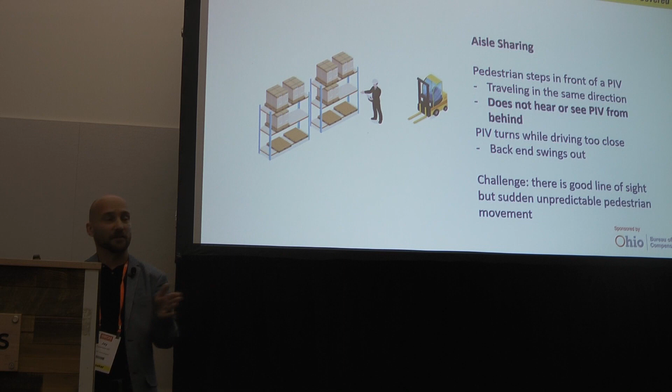Here's a scenario that's brought to us all too often. It's called aisle sharing. Here, a person is walking in the same aisle as a PIV, and we have good line of sight, right? The driver can see the person, but the person doesn't hear this PIV approaching from behind, doesn't see the machine in their peripheral vision, and one of two things can happen: the person can step unexpectedly in front of the machine, or the machine turns, and forklifts turn awkwardly on the back wheels, so that machine can clip a person.

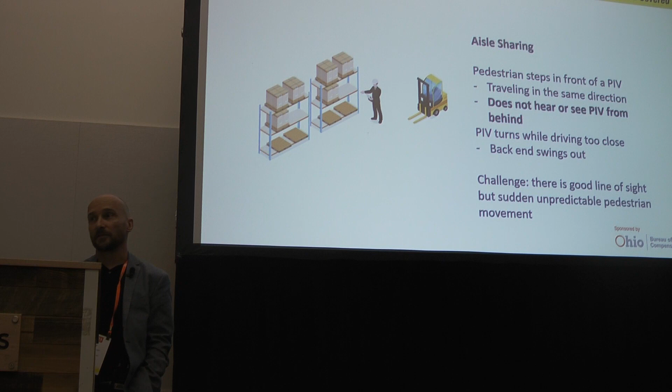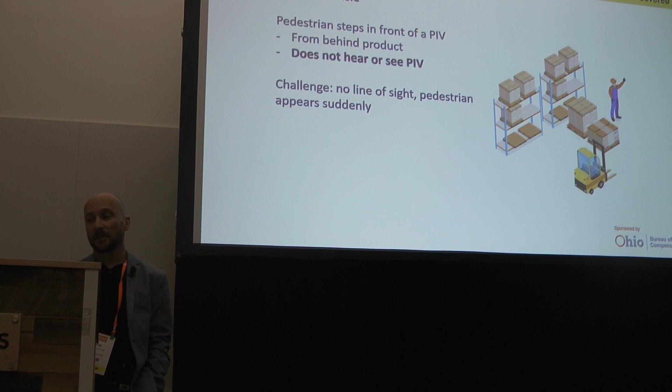You hear about this one a lot. So here again, we have good line of sight, but you have some sudden movement of the pedestrian, and the driver doesn't have enough time to react. Similar in forklift lanes of traffic, people can step out from behind obstructions. Here, in this case, we don't have good line of sight, so it's very unexpected. Driver's going along, person steps out, contact happens.

Order checkers — this is one of the most complicated and interesting scenarios that we've dealt with. You're on a loading dock and there's a lot of chaos. It's a wide open space, you have a lot of congestion, and the last thing that happens before product goes on your truck is you have order checkers or verifiers. These people are checking the contents of a pallet against a list to make sure that what is on that pallet is supposed to be there. Now at the same time, you have PIVs that are staging pallets, so you have new material coming in behind to be checked, and verified pallets being lifted and going onto the trucks. Again, they're faced away from traffic, and they're coming out from behind pallets. Just with all the chaos and congestion on a loading dock, it's a very dangerous situation — one that I think we handled pretty well, so I'm looking forward to talking about a solution for that.

Doorways — this one's kind of obvious. You open a doorway, if that's a forklift aisle, as soon as you open it you can't see through that door, you can't see through the wall, so unexpectedly there can be a moving machine on the other side.

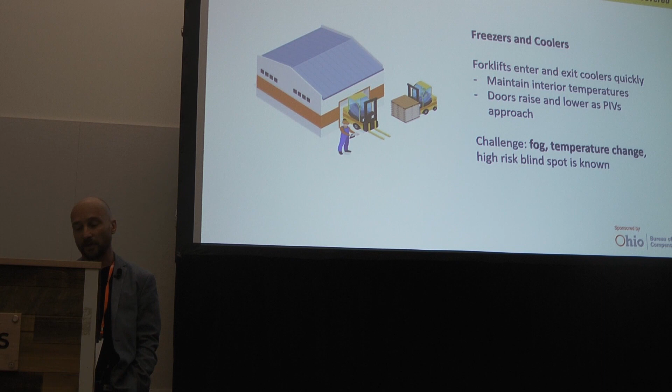Blind corners, again, a fairly obvious one. We can't see through walls. These are high-risk locations that are probably known, and if you have these intersections or corners in your facility, there's probably already a convex mirror there so you can see around corners, but accidents still happen.

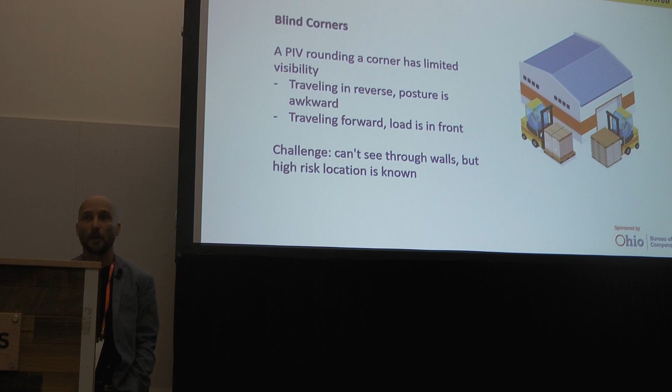Cross aisles. Most places we go have things like blue lights now, designed for these cross aisles. Mostly it's machine traffic going the long ways in cross aisles, but you do have people and machines going the opposite direction. That blue light is intended to give you some warning, but often it's not seen, and by process you should beep and stop when you come to an intersection, but things happen, horns aren't heard, and you still have near misses and often collisions at these cross aisles.

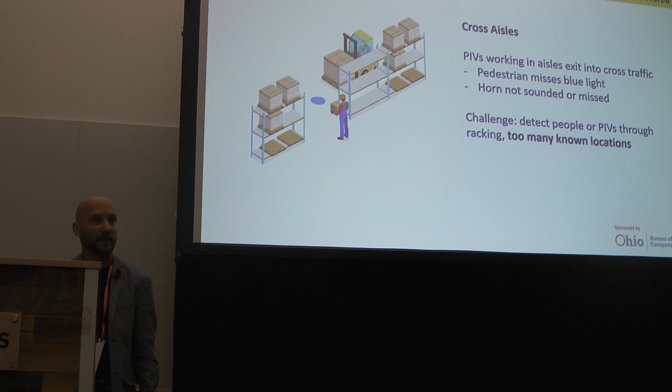This is like a blind corner, but it will be handled a little differently because even though you know it's a dangerous location, there's just so many of them that we handle it a bit different than a blind corner. Staying with racking, in addition to hitting people or other vehicles in cross aisles...

You have tight spaces, so PIVs just run into fixed objects. You're trying to make a tight turn, trying to take things in and out of racks, and just with those space constraints, things happen.

You can't look at this scenario without thinking of that viral video from a couple years ago. Every time you tell somebody that you handle forklift collisions, there's these images. I see a couple of smiles in the room where the driver has a slight bump to one corner of a rack. That rack falls, hits the next one and the next one, and before you know it, the whole warehouse collapses.

Shortcuts. Yes, this does happen. You should go to the end of the aisle, turn, and then go down the opposite direction. But there's a temptation if there's no product filling up that space in your racking. Drivers will see that space, want to go over there, cut through the racking, and a couple of things will happen. They'll either hit that racking, or—we've heard more than once now—hit the posts that hold up your roof, unexpectedly running into one while cutting through racking. Unfortunately, the masts of your machine line up nicely with these structural posts.

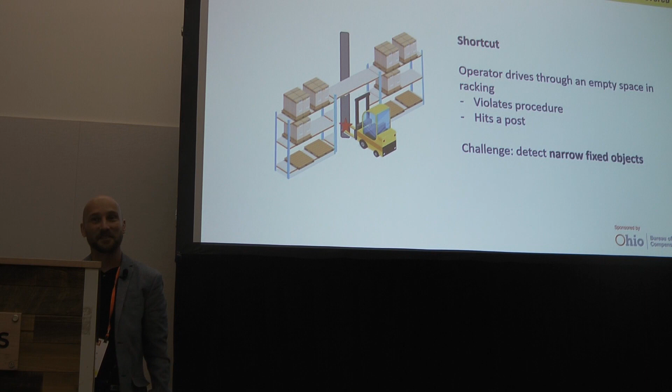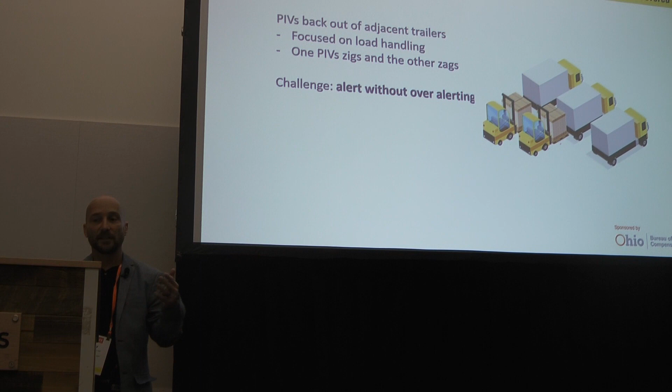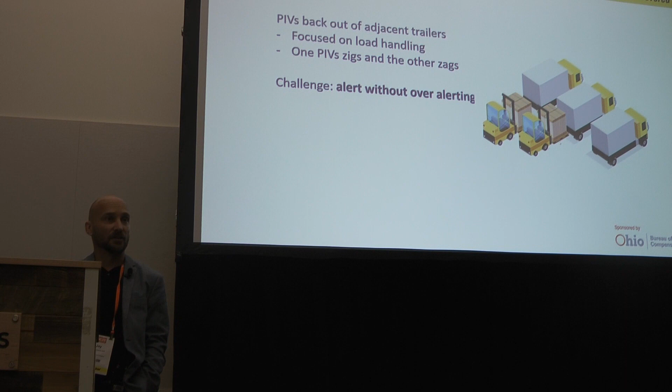Loading docks. Let's think back to the picking scenario, the checkers, where you have these congested loading docks. Here there's already a heightened level of awareness. You have machines moving in and out of parallel trucks, and a lot of times these machines back out of trucks at the same time and just hit each other. So again, things like basic proximity sensors don't work so well because they would just be alerting all the time. The challenge with forklifts backing out of parallel trailers is to alert drivers that something is nearby without over-alerting.

One driver with two specialized forklifts. Admittedly, this one's not a widespread scenario, but it's a true one, so it's worth mentioning. It was the inspiration for our forklift-to-forklift collision scenarios, and we were hired to solve this one. We had a contract where this company had specialized forklifts, and they would have one driver take a specialized machine with one attachment, do a task, park it, take a second one, forget the first one was there or where they parked it, and then a few minutes later run the second one into the first one. So we'll refer to this as the parked PIV scenario—the challenge here being simply forgetting where you parked your other forklift.

So you're aware of all these things. You're aware that your forklifts hit things. You're aware of your high-risk scenarios, where they hit them, and you follow the guidelines. You have nice yellow painted lines around your place, yellow railings that physically divide your machine and your foot traffic. You wear brightly colored vests.

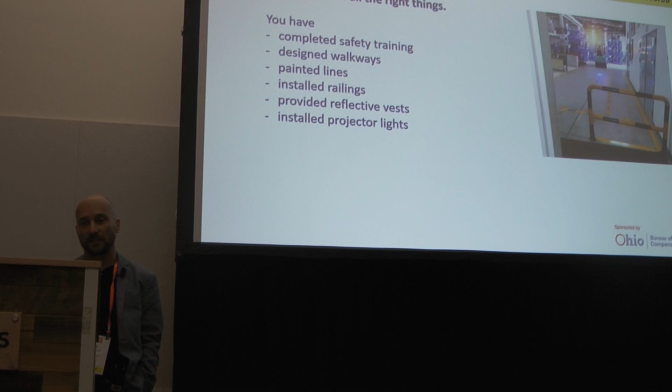You have the projector lights, like mentioned before, to give you a little extra warning. You have blue lights front and back, and the red curtain lights, so people know exactly how far back to stand so that if the machine spins on its front wheels, they don't get their legs taken out. For blind corners, you have convex mirrors. So you've done all these things.

But accidents do still happen. So as we continue to add safety measures and precautions, why do these things still happen?

Well, here are some common themes we've noticed in our many conversations. One is poor visibility. You lose line of sight for a lot of reasons, and the layout of your facility is one.

It's a good thing when businesses grow and you're trying to get more out of your building. But as you become more productive in the same space, you have more blind spots. You have more equipment packed into the same size container, and that can cause poor visibility. The obstructions of the mast on your machine, like mentioned with that shortcut scenario, line up with all the other vertical posts in your building, and you can't see things. Some are even wide enough to obstruct a person.

PIVs are quiet. Probably more than 90% of the people we talk to these days have electric lifts, so they make almost no noise—you can't hear them coming. And even in the internal combustion machine places, these are often factories with a lot of background noise that drowns out your PIV noise. The current technology is passive.

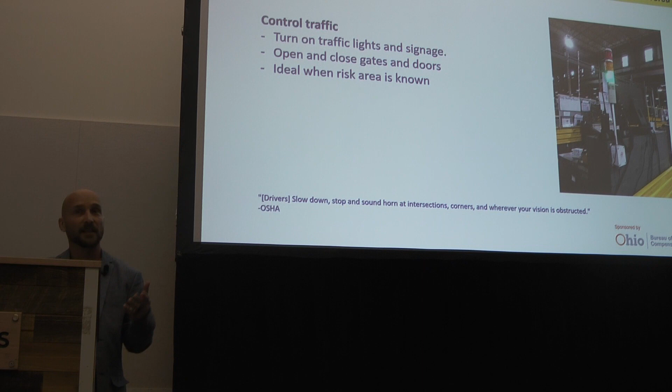You can alert people directly, device to device, through some technologies. People can have devices that beep and vibrate and let you know when something dangerous is about to happen. And you have similar equipment that goes onto forklifts themselves, telling you when a person's too close. You can change a light, sound an alarm, and let a driver know that a PIV or a person is getting too close.

This is important for people to have alerting devices, because even though people should have the right of way to forklift traffic, everybody knows what happens if a forklift and a person make contact—doesn't matter who has the right of way, the forklift is going to win. Another control is slowing and stopping a forklift. If you have a congested area where you want to control the speed, you can slow that machine down automatically, and if a collision is imminent, you can stop the machine through some kind of engineering control.

And finally, we have access control. Access controls are nice because they do a couple of things. They confirm who's driving your machine and make sure that person is trained to do so. And secondly, it provides some accountability.

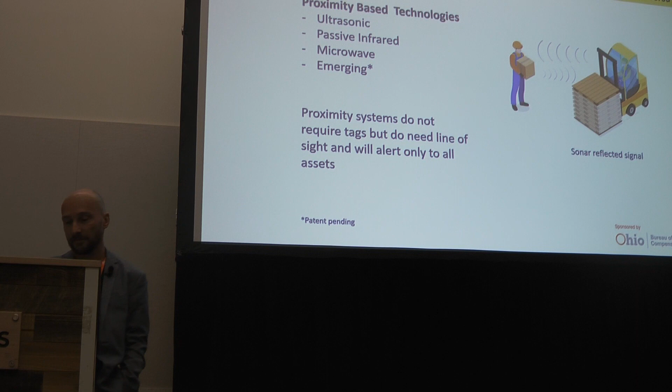And then you have AI-based technologies like cameras and LiDAR. These are attractive technologies too because people don't have wearables, but everything has pros and cons. You don't need to have wearables, but you do need to have line of sight, and you do need to have some intelligence that goes along with camera or LiDAR technology.

So let's choose some systems. Your system will succeed if it meets these criteria. It has to alert when it's supposed to alert. It has to alert reliably and repeatedly. It can't have false positives.

This drives people crazy more than anything when a system goes off and you think that there's danger nearby, but it just goes off at random. It has to work in your environment. So, like the case of the freezer, if you have big temperature differences, if you have noise, if you have a layout that is spread out or very confined, you have to have a technology that will work in your environment. If you have a lot of metal, you have to have something that's not susceptible to reflections off of steel or that kind of interference.

It has to be easy to install, maintain, and use. If you have 30 forklifts and you have a system that takes a day to install for each machine, now you're looking at a month before you can even begin to roll out a system and start to get used to it. And it has to not disrupt your current systems.

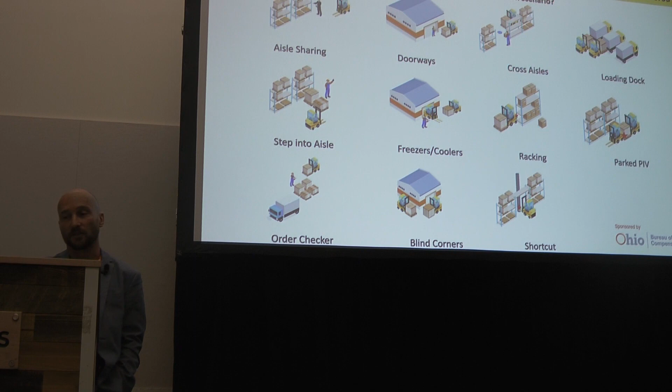So which technology, which control can help each scenario? First, the aisle sharing scenario. Here, again, we have good line of sight. Our recommendation here would be a radio-based system or a magnetic field generator.

The reason being, you need to alert that person that the machine is approaching. Proximity-based systems are good for the driver. AI is also good for the driver, but that's more of a one-way alert. And it's good to have these, but this scenario here, we would recommend having those personal alerts as you're approaching from behind.

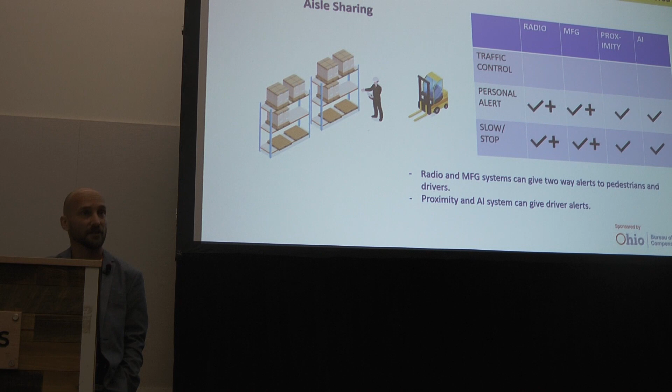Similar when stepping into the aisle, right? There's an even stronger recommendation to have radio or magnetic field generators in these cases because of the non-line of sight. AI can't see around corners, proximity sensors won't see around corners, but with radio technology or a magnetic field, you can see through those objects.

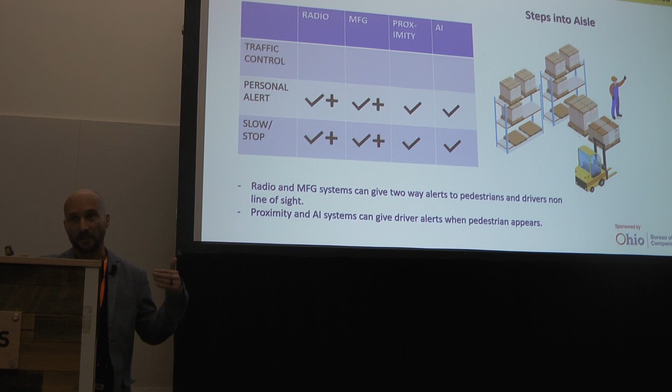Again, similar here with order checkers, right? You have these people moving around, they're appearing out of nowhere from behind pallets of product. So again, you need those two-way alerts. And proximity alerts, due to just the complete congestion on a loading dock, we would recommend against here.

This one, we're really proud of this scenario with order checkers or verifiers, because we did roll out a system with personal alerts, and we got immediate feedback that the people on the ground who are walking around pallets simply didn't realize how many close calls they were having every day. So we got good feedback that a system implemented in these areas works well.

Once you get those gentle nudges, right, a beeper's going off because a machine is coming in behind you. You don't like to hear that. Nobody likes to hear that noise. So it affects your behavior positively, and you start to look out and keep those alerts from happening. So again, we're really proud of that scenario.

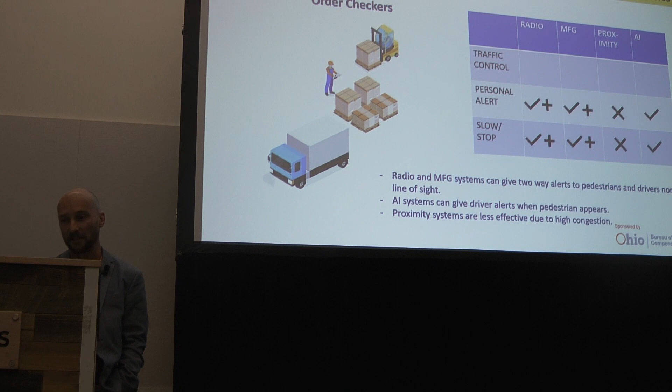Doorways, right, the kind of control we would recommend here is a traffic light. This way, from one side of the wall, you can know what's on the other side, and we would recommend you use non-line of sight technology here to detect what's on the other side of that wall. But in fairness, you can split apart sensors and lights. So if you have a proximity sensor on one side with a light on the other, that will work pretty well just to let you know what's on the other side.

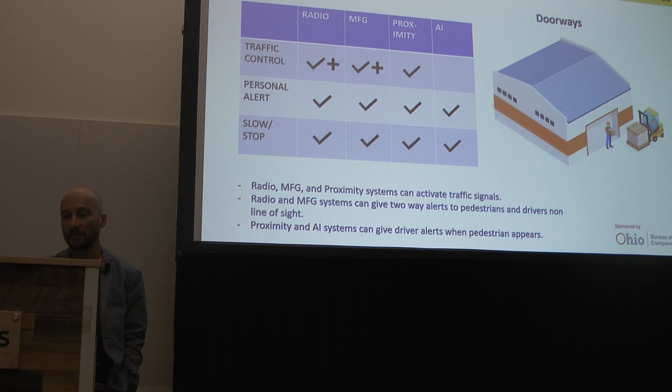Freezers and coolers are similar to doorways, and again, always this non-line of sight sensors paired with some traffic light or lighted sign that lets you know exactly what's on the other side. Here, from what we've heard, cameras will have trouble. If you have a camera-based technology in a freezer, that is susceptible to fogging, which will affect that sensing.

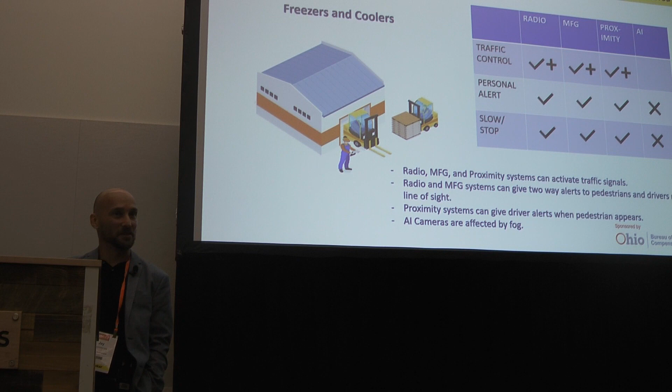But we did also have some feedback that - I guess they didn't become a client - but they figured out a way to use proximity sensors in a freezer, because their freezer only had machine traffic, so they knew exactly what they were looking for, and they were able to use those kind of sensors to signal a light. Again, the key there is they knew what was in there. They didn't have to differentiate between people and machines, because they knew every time a sensor saw something, it was machine, machine, machine.

Blind corners, right? Similar recommendations here. Your control is a traffic light, lighted sign, something that can tell you what's on the other side. Radio and magnetic field technologies can be tuned to tell you whether you want to alert to a person coming around the corner, or a machine coming around that corner. It's better than proximity sensors, which will tell you if anything's coming. We're not very concerned about person-to-person collisions - that's not what's going to do damage - but we really want to know when a machine approaches that blind corner.

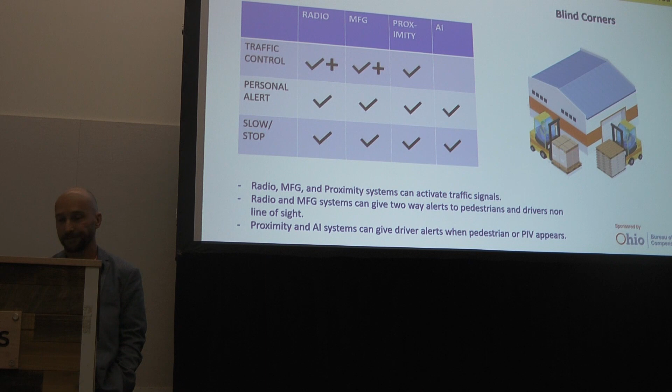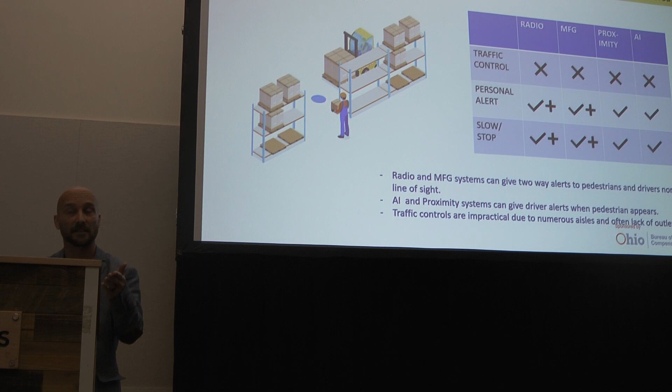Cross aisles, this is similar. We need that non-line of sight technology, but we need personal alerts in this case, right? We need those two-way alerts between machines and people, because the number of cross aisles are just too numerous to handle the same way as a blind corner or a doorway.

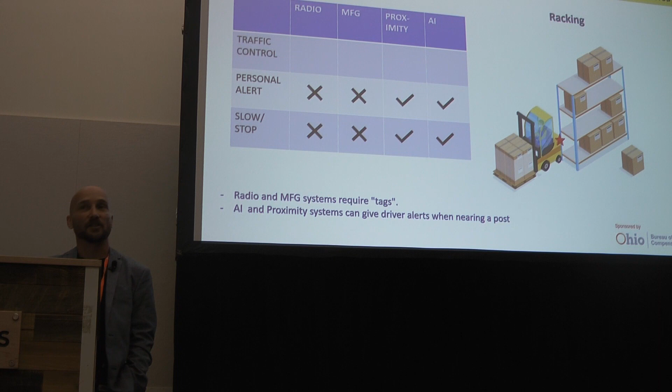Now racking, right? We're going to flip it the other way, because racking has too many posts to tag, so your radio technologies aren't very good in these scenarios - you would have to tag every single post with some kind of transmitter or receiver to protect that asset. So here we would recommend a proximity sensor or AI, some kind of camera-based or LiDAR, so that when you're backing into racking or a fixed object, you need something that can detect general nearness.

Similar here with the shortcut scenario. It's not very practical to go around and install a radio on every single structural post that you want a forklift to not hit. So you need some general object detection technology to know when you're near these kind of posts.

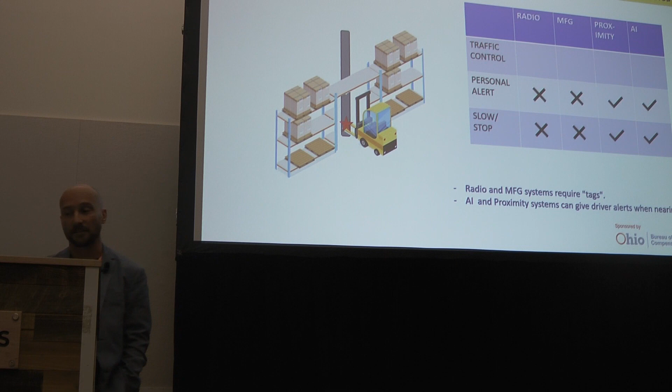Loading docks - we know this scenario well because we implement a radio technology, so that's what we recommend here. We know that radio technologies can be programmed at a very fine level. With loading docks, you can set up your sensors on the back of your vehicles to only identify when you're going to collide back to back. You can adjust the alert levels too, so you get more gentle warnings instead of continuous beeping.

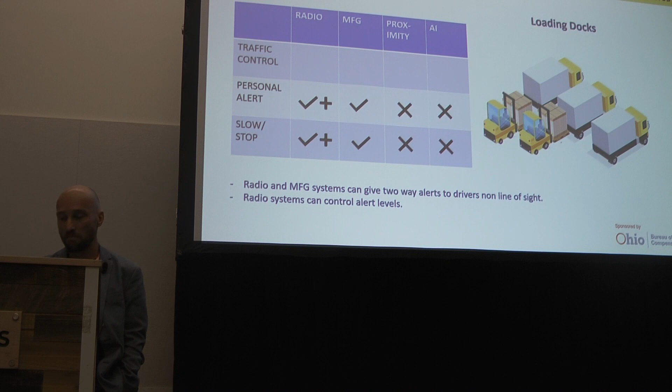And the parked powered industrial vehicle, you can handle this one with proximity sensors and AI as well, but we know definitely that you can handle this with radio technologies. Radio technologies are very low power, so even when your vehicle's off, you can draw some current and keep that sensor system active.

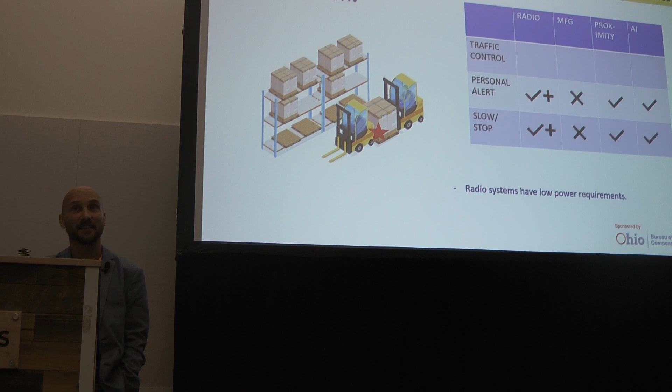Now finally, you have all these single occurrences of places that you're worried about. How do you start to think about designing a system that will fit your whole facility? Do you have one system that can handle all these scenarios, or do you piece it together - one system for intersections, one for direct alerts? Then you have to ask yourself a number of questions, like what are my main scenarios that I'm concerned about? Let's address those first and then get the peripheral ones second.

How many forklifts do I have? How many wearables do I need? And notice, how many wearables do I need is not necessarily the number of people that you have working for you. It could be the number of visitors you expect, or the number of contractors or seasonal workers, if you're not really so concerned about the people that are there every day and know your operation.

Number of blind spots. How adjustable is the system? A lot of times you don't get it right the first try, so you deploy a system and it's not exactly as you want it. Can you adjust it on site? Can you make it work for you? Is it tunable? And what are your future uses - is this as far as you want to go with it? You prevent collisions and you're good, or do you plan to build more technology on top of this in the future? Are you interested in things like tracking, utilization, data that you can collect?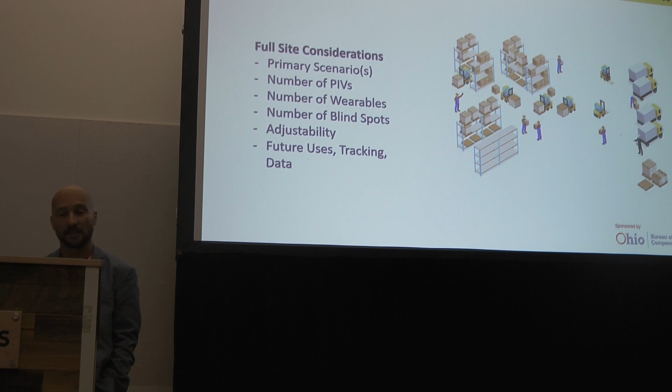Which brings us to data. We have all of these different kinds of systems that we can roll out, whether it's your blind spot telling you that something is encroaching on that area, or your forklifts, or your people, your access controls - we can collect data. And data's good. Data gives you visibility.

So things that can be collected from these various forklift attachments are impact reports. I know most people are familiar with these - when you hit something, an email is generated, and it associates a driver with that level of impact.

Inspection status is an important one - you should have daily inspections, weekly inspections, monthly inspections. It's good to know when a vehicle was last inspected. Runtime - how often is this vehicle used, what are your hours of runtime? The location of assets, and the near misses - how many near misses does a forklift person have? How many warnings? How close are they getting to other dangerous things?

And then what can we do with that? Well, one thing that can be done is automate the generation of near-miss reporting and identify your training opportunities. You should have training after an incident or a near miss, but OSHA recognizes that only about half of actual incidents are even reported, and almost no near misses are reported, because people think, well, I didn't actually get hit, so no harm, no foul. Am I really going to stop what I'm doing, go fill out a piece of paper, and sidetrack my day?

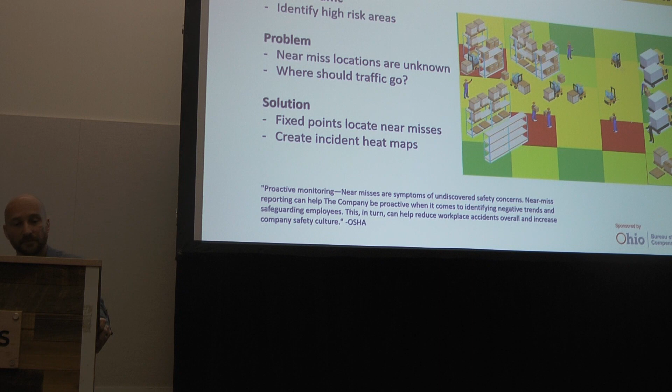You can locate equipment and people in real time. The same beacons that are installed, the same fixed points that offload data - if you know where and when something happened, you can use that same infrastructure to find things now. We've been to places where it actually takes longer to find the forklift than to install the system. Your places are big, things are moving around, and you end up walking out to find a machine that's not where you think it's gonna be. But by implementing a real-time location system, you can bring up your phone and find out where the desired forklift or person is, built right on the same system you're using for collision alerts.

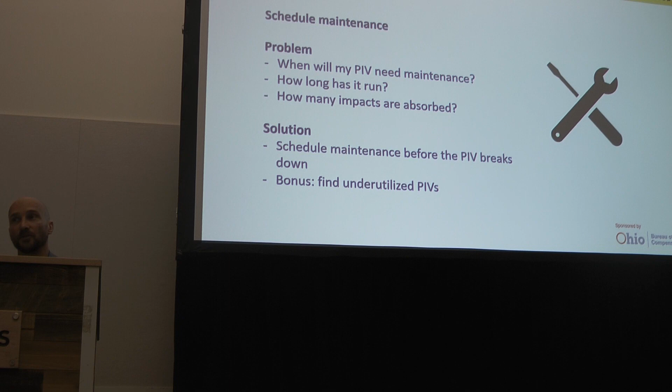Preventative maintenance - it's much more convenient to repair or fix your forklift before it breaks down. You can use things like runtime, similar to changing the oil in your car. There's scheduled maintenance - how long does that forklift run? Let's do preventative maintenance on it. You can look at how many impacts are absorbed and when the last inspection check was done, and use all this information to conveniently schedule your next maintenance. Additionally, if that information shows a lift was never inspected or its runtime is very low, you can find out when machines are unused or underutilized, and use that same information to right-size your fleet.

Finally, we can use all of this information to evaluate process change. Everybody is interested in improving - you're spending time and money to try to improve things, but how do you know if that's having a positive or negative effect? If you're tracking near misses, you can look at your near miss reporting as the system is rolled out and track that over time - are my near misses going down, are my warnings going down - and see a real positive or negative effect that you can measure. If you're a company with multiple sites, you can see what system is working where, and propagate the successful changes across the organization.

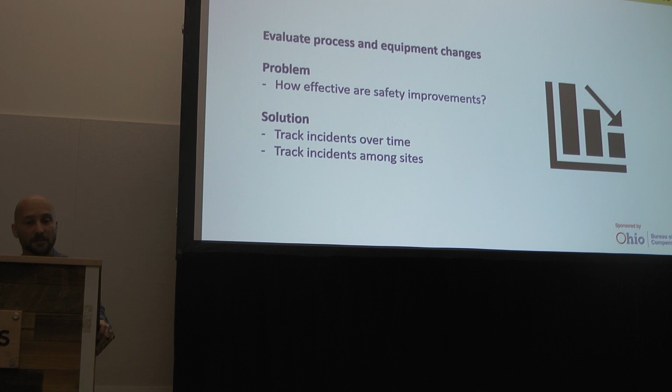So, things you should take away from the session today: collision avoidance systems can prevent accidents. You need to choose the right technology, identify your scenarios, and choose the right system that'll work for you - do I want a technology that can see through walls, or is that not the right technology for me? And data can provide visibility everywhere from anywhere, so think about what data you can collect from your system and how you can use that to drive processes.

I think I'm a little short on time here. Would you like to add anything? Not really, I think you covered everything pretty well. Questions from anyone?

Are your systems customizable? Can you have multiple systems within your plant that would work together? Yeah, you can have systems that are customizable by machine or even by person - every single device can be customized to alert when and where you want it. So the wearables alert the person wearing it, but does the driver get alerted at the same time? Yes, radio technologies provide two-way alerts.